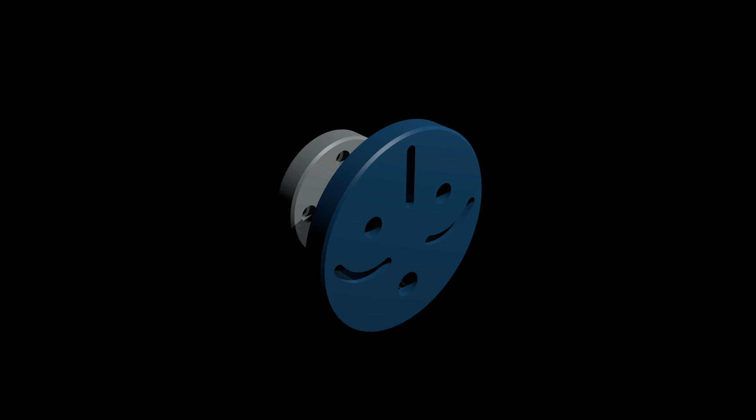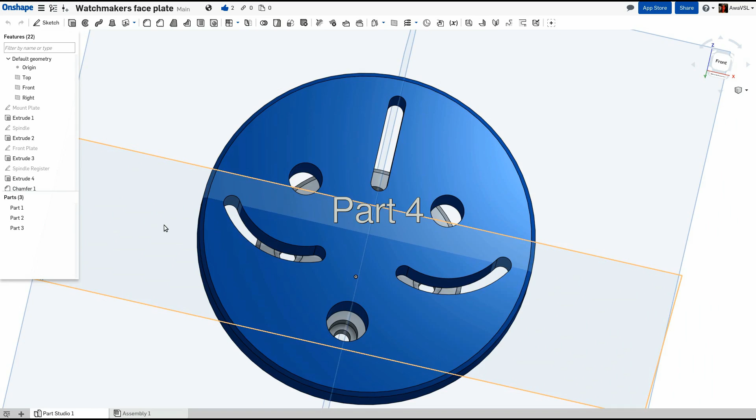I completed the basic rough geometry of the main plate in the last video, so the next step is to machine the slots used to locate the 3 clamps. These clamps need to hold the work so that turning operations can be centered anywhere within the diameter of the watch movement. There are a number of different patterns of slots, but one of the most common is the one shown here, with a single straight slot in the center and 2 curved slots symmetrically either side.

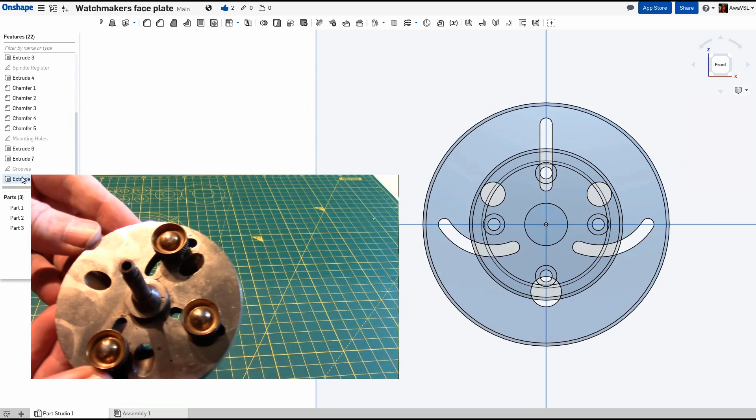An example of this pattern is the Boley faceplate included with a Watchmaker's Lathe I won in a box last week. How the center of the slots is defined varies, so I haven't been able to find any specific description of the advantages of the different arrangements.

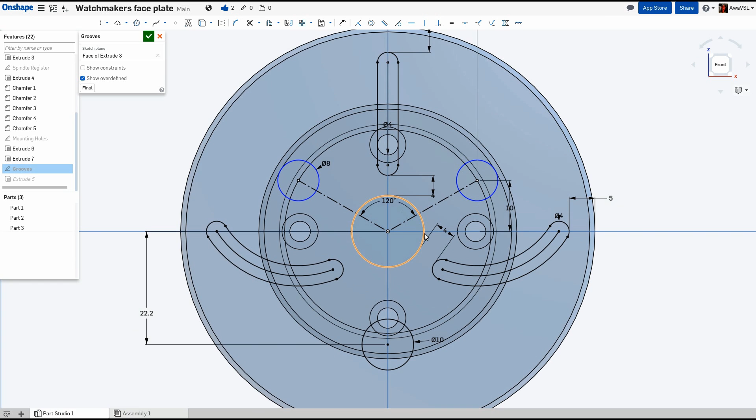So I've based my own design on geometry that's practical to machine. The central slot is easiest as the only defining constraints are that the line goes through the center of the plate, and the end point distances. The end closest to the center is constrained by the closest practical distance to the central spindle, leaving room for the thumb screws. The distance to the circumference is only constrained by the need to leave enough material to ensure the plate is strong and stiff enough.

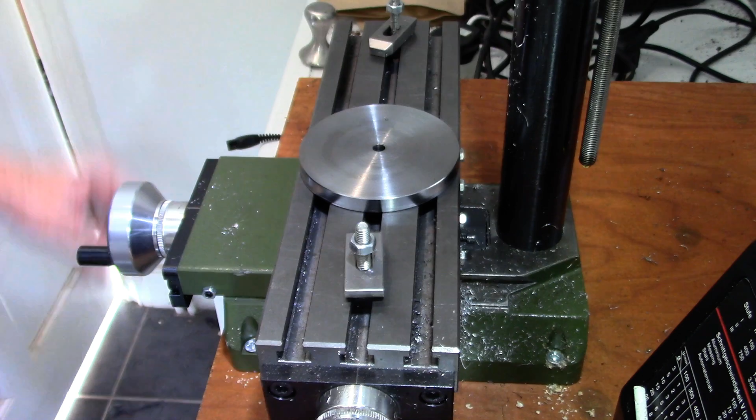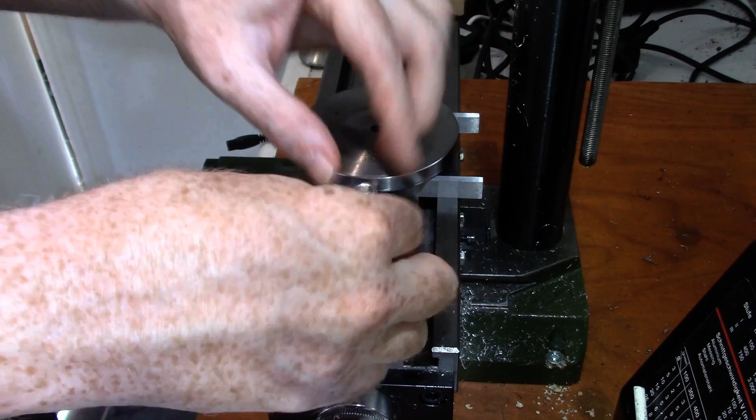The straight central slot will be the first operation, but I'm also leaving room to spot and center drill the 3 round holes defined in the schematic. Once I've defined these 4 features, all other operations will be relative to them, so they should be straightforward to set up.

I'm using an edge finder to locate the center of the plate as defined by the existing hole. This isn't perfectly central relative to the current edge, but the edge has more cleaning up to be done once it is mounted on the spindle, so the hole is the best reference for now.

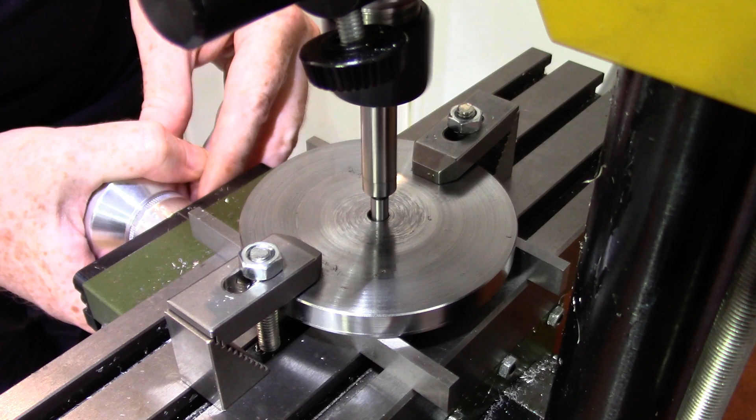The edge finder is a really snug fit in the hole, which means I have to be fairly close to the centre to start with, and finding the right point on the curve is fiddly. I need an edge finder with a smaller end, or a proper conical centre finder.

The distance from the end of the slot to the outer edge isn't a critical dimension, so I'm just marking it roughly with a Sharpie.

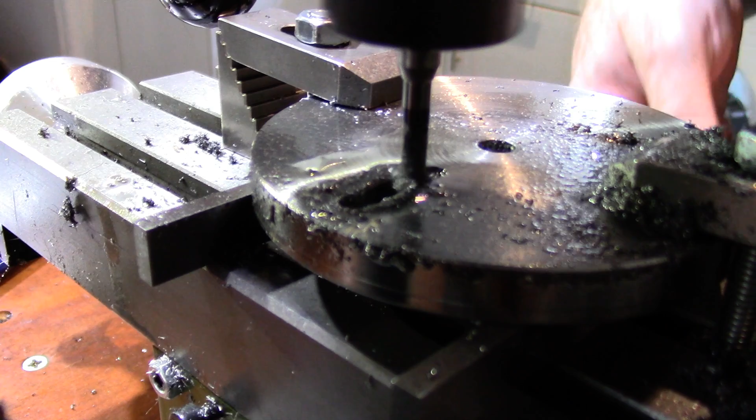I started out with a 0.1mm depth of cut and lots of chatter during the plunge cuts. As the slot got deeper, the plunge cuts got easier as the cutting oil was contained around the cutter. I increased the depth to 0.2mm and finally to 0.25. I attempted one cut at 0.3mm, but the chatter increased dramatically, so I didn't try that again.

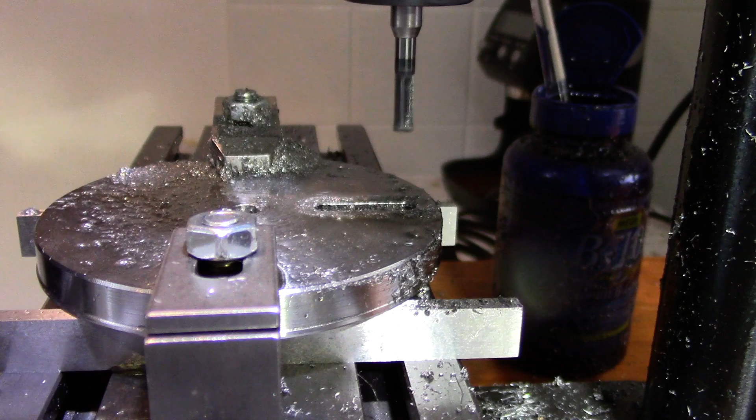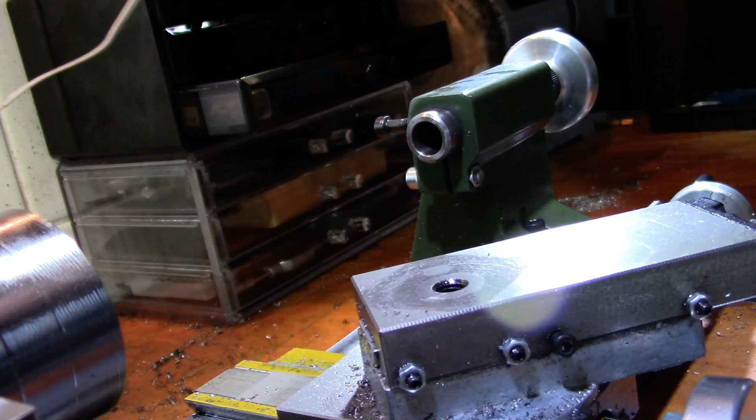In part 3 I had a lot of trouble with chatter while turning down the outer diameter of the faceplate spindle in the 4-jaw chuck. The chuck is heavy, protrudes a long way from the headstock, and seems to have a few problems with heavier parts that protrude further. I've switched back to the stock 3-jaw chuck as the dimensions for the rough turning aren't critical. This part is destined to be mounted directly on the headstock, so I can do the final dimensions once it can be mounted that way. The 3-jaw chuck is smaller, lighter, and doesn't protrude nearly as much.

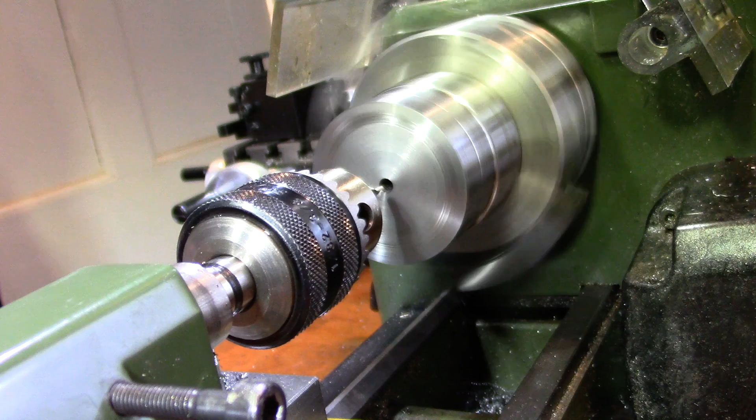The part is already centre drilled, but I need to re-drill the taper for the live centre as it isn't exactly centred for the 3-jaw chuck.

The first pass is a little noisy, but that's mostly bringing the diameter into concentricity for the new mounting and dealing with the chattered surface from the previous cuts. Once the cuts are uninterrupted, it gets a lot smoother and cleaner.

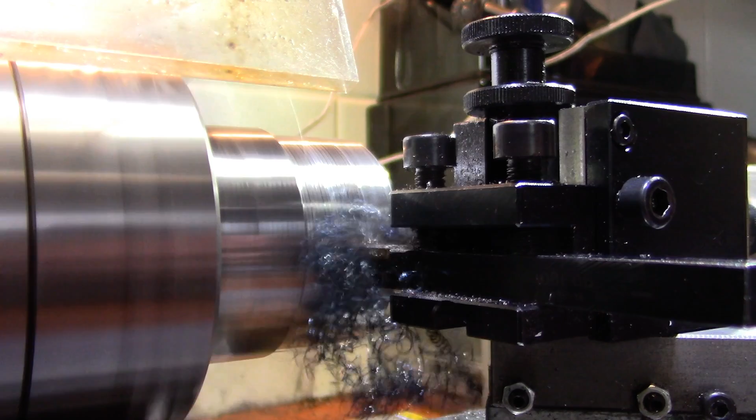The lathe doesn't have much torque at this speed, so my depth of cut is limited by the feed pressure, and I can't get away with more than 1/10 of a millimetre. This makes for a lot of passes, which is fine, but it also means the chips are very thin and long. I assume the chip breaker is just not effective with chips this flexible. I have to stop and clear the tangled chips between each pass.

However, even clearing the chips after each pass is not always enough, and eventually this happens. The chips have been pulled behind the chuck, wrapped themselves around the spindle, then been pulled between the backplate and the main bearing. This is going to take a while to clear out.

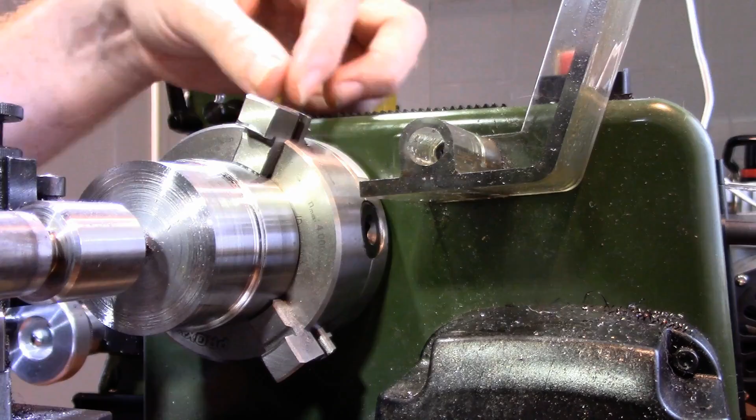As I put off the messy cleanup job, I thought I'd go back to the lathe while the work is still set up.

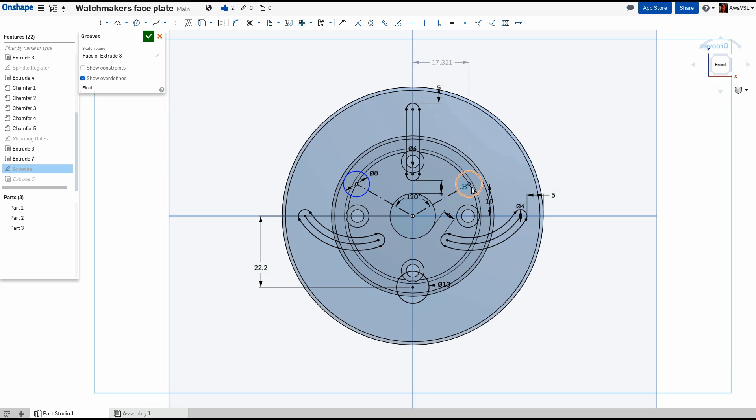Another important feature of the faceplate are the 3 holes. Darren Radcliffe commented on part 3, letting me know that these are used to locate the centre of the part being machined while adjusting the clamps, viewed from behind. I defined the 2 symmetrical holes as the centres of curvature so I could drill pilot holes and use them as anchor points on the rotary table when I come to machine the curved slots.

The camera was set up for drilling all 3 holes, but somehow I've lost most of the footage. Instead of a 10-minute video clip, I have a single photograph taken as I started drilling the first hole.